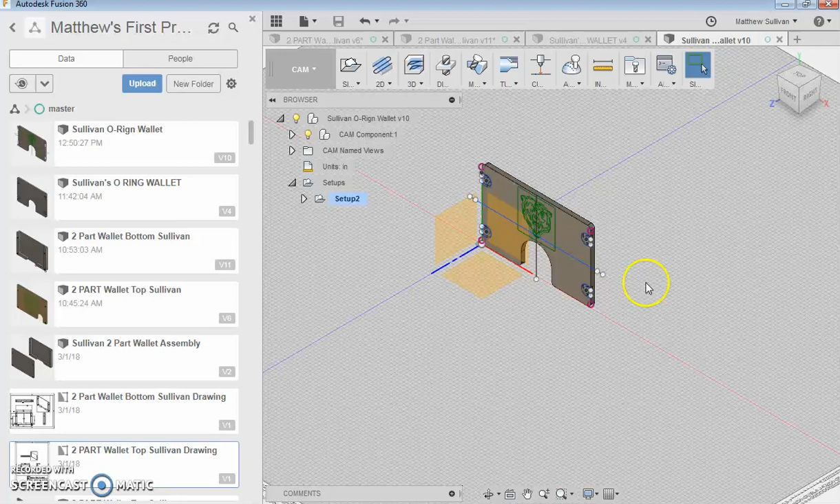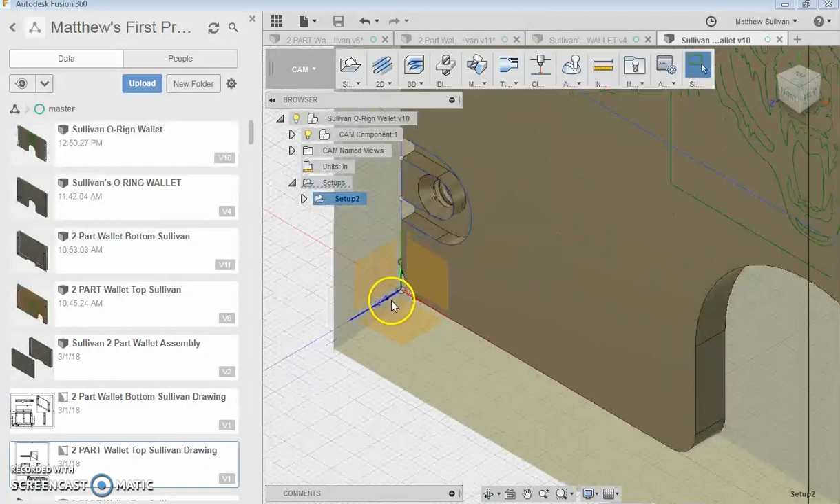In this video we're going to be covering a combination of setting up the backside operation and post processing both setups for this final activity. If you notice, our first setup is going to be right here on the face. This is our XYZ0. Our next XYZ0 is going to be the backside facing down behind the part.

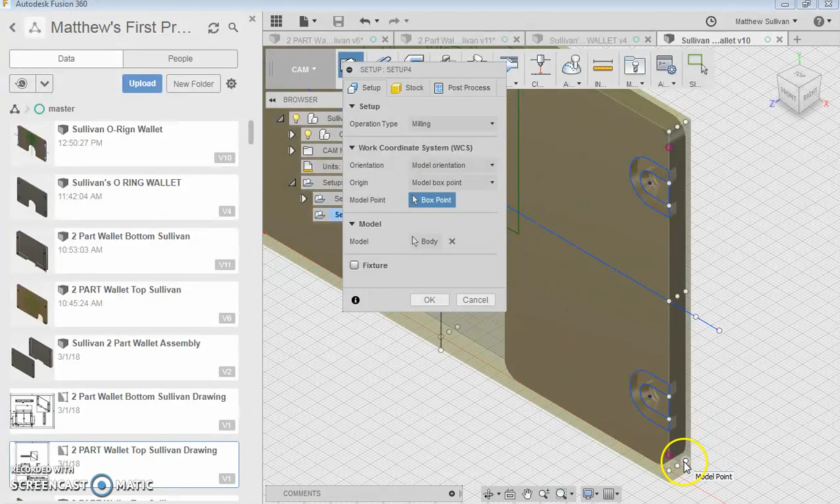And we're going to do that by going to setup, and we're not going to do box point. We're going to do model or stock box point. We're going to go to model box point. The box point we're going to select is going to be right here. The complication is our Z axis is facing the wrong way, so we could try maybe flipping it.

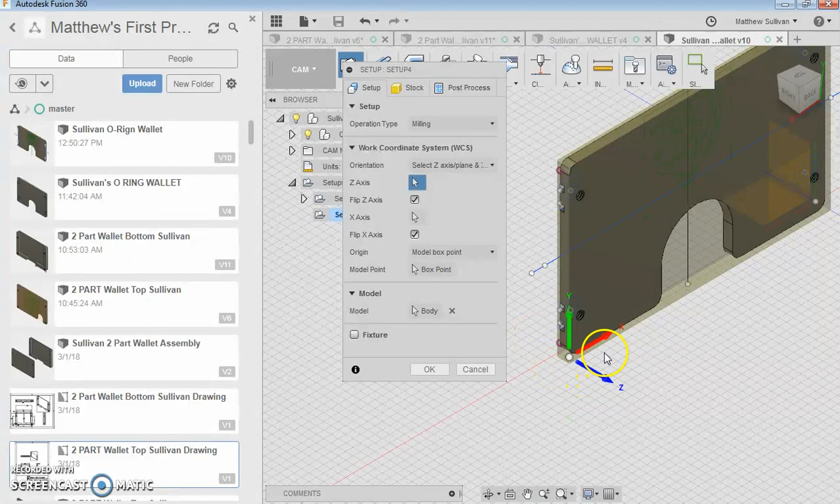One thing you could do is try flipping it and flipping X, and right now it is flipped the correct way. This is one option to quickly reorient your WCS just by touching the arrows. I'm left clicking the arrow and left clicking the arrow to just kind of move things around. If I go down here to box point, I have everything lined up. I'm not sure if we're going to come back in and select a Z face and an X face, but right now it looks like everything's happy. There's a possibility we may need to do that.

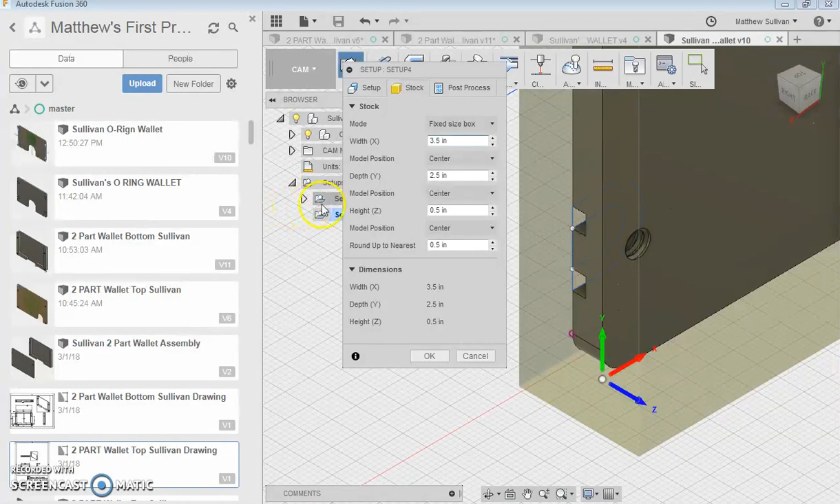Over here in stock, we're going to flip from relative size to fixed size, so we can type in an actual distance. And that's going to mirror our distance over here. So 3.5 inches is about exactly what we have here. We're going to cut the material 3.625 for this activity, so we have a little bit more material to cut out. And it'll match what we had over there.

We have a 1/2 inch for our height, and then 2.5 on our Y. I believe it was 3 inches. Hopefully it is 3 inches on the other one. Otherwise, we have to go back and make some minor adjustments on the other bit of material. But we do have 3-inch stock. It's not 2.5-inch stock. We're going to go ahead and select OK.

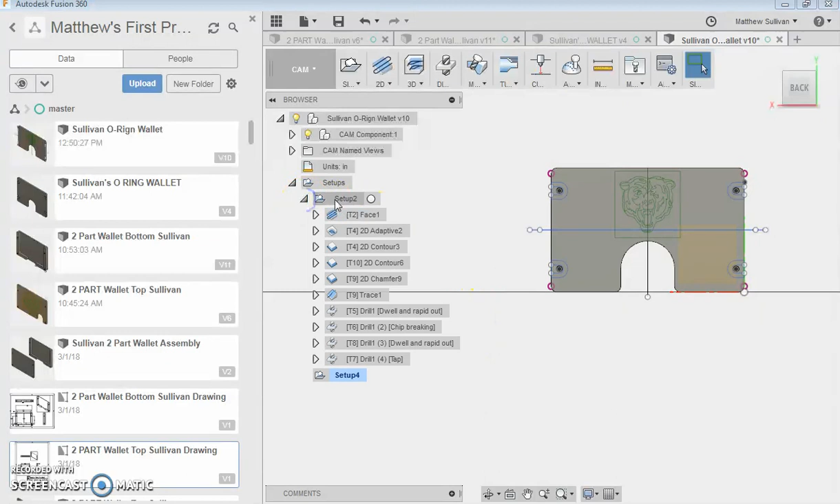And while I'm thinking about that, we're also going to go over here and right-click and edit this one and just double-check the stock is at 3. So the Y-axis here is not 3.0, so we're going to need to update that here too. And all of a sudden, all of our toolpaths appear to have gone bad. They're actually not bad. You just need to highlight all your toolpaths, generate, and they will update automatically.

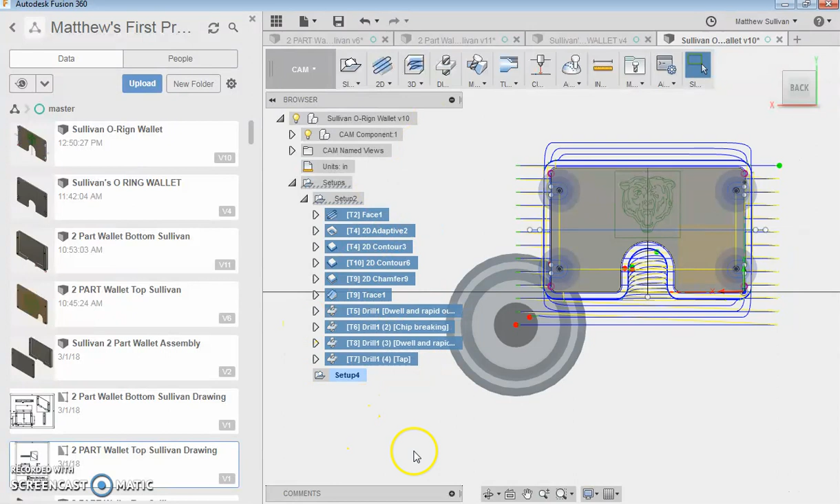The only thing I really noticed that changed here is this adaptive. So the adaptive clearing is going to take a couple more passes to clean things up, but it's going to add some more time. But the material is 3 inches, so that's what we have to work with. So here on this setup, we're going to minimize this one. We're going to come back over here, go back and edit. It looks like we're good. Stock is now set up.

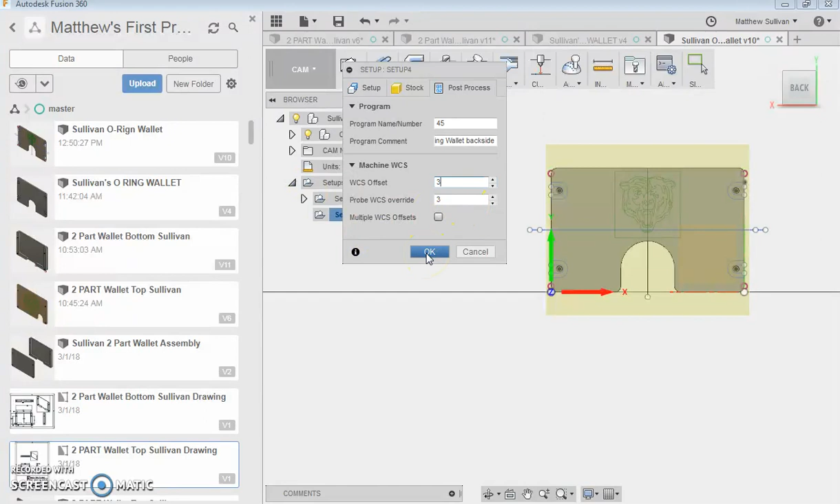Post process. I believe my last post process was 44, so I'm going to go 45. Program comment is: put your name, O-ring. I'm not sure if you can do dashes, so I'm going to do ring, O-ring, wallet, backside, or bottom side, or however you want to call it. WCS is going to be number 3. Again, we're going to select OK. And now we have our WCS set up exactly where we need it to be set up.

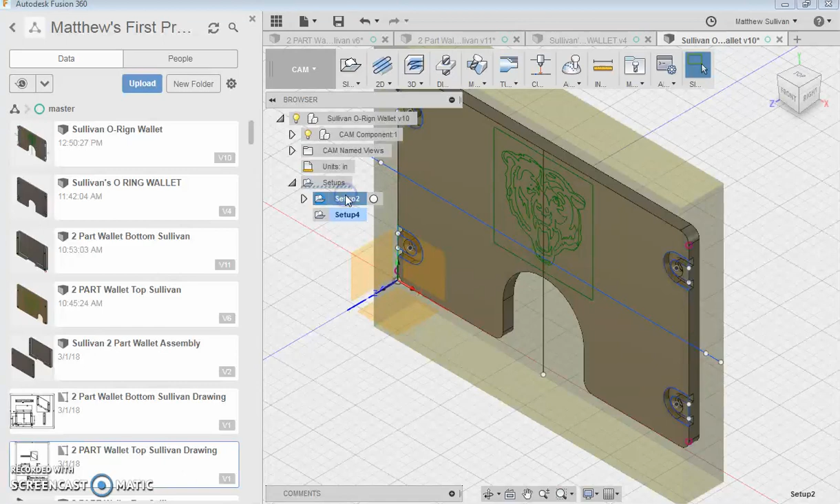And we are going to go ahead and be ready to manufacture our parts. So do our toolpath. So Z is this one. The Z is on the front face in the first quadrant, on the back face in the first quadrant. And it is on the first quadrant if you kind of rotate things and click on the back side. This is the first quadrant. So now we're going to go ahead and continue doing our toolpaths.

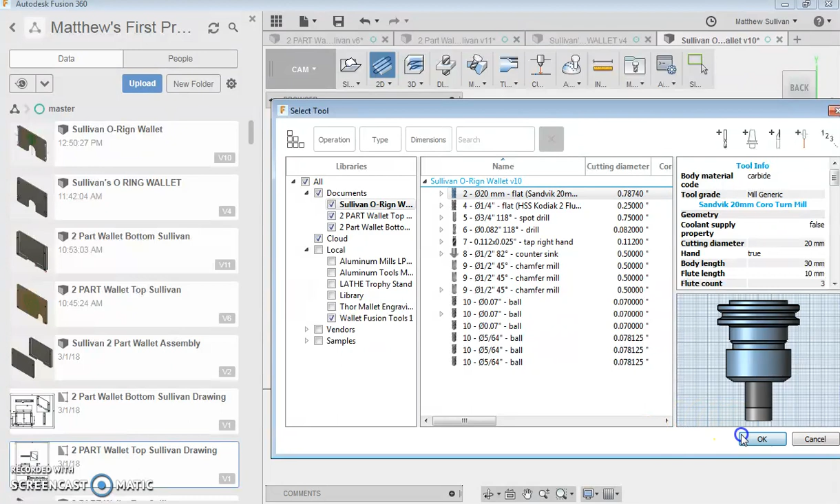We're going to go over to a facing operation, which is right here at the top. What are we going to face? Well, we're going to switch to tool number 2. Select OK. Disable the coolant. Passes, pass extension 0.45. Stock offset, I believe we need to change that. The step over is 0.25. Select OK. Let's just see what this looks like.

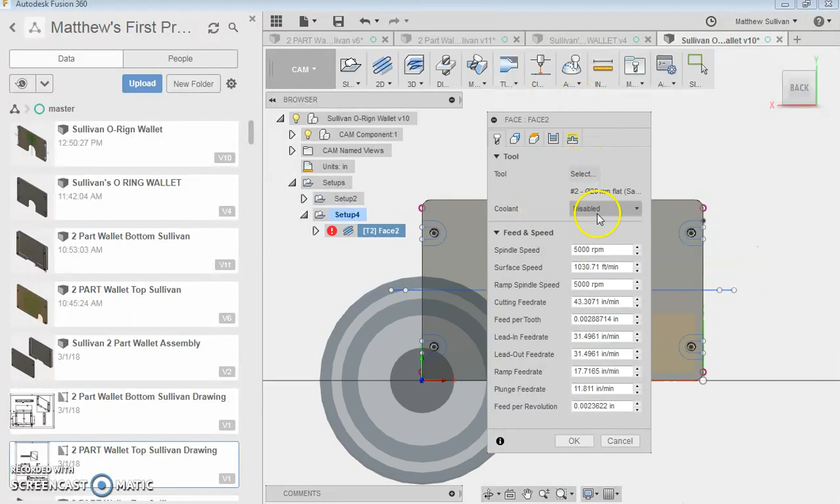I forgot to go ahead, right click, edit. We also need to do not both ways, but climb milling. Otherwise, material could come flying out of the machine, or we might break a tool, so we do need to be on climb milling. This will take care of 100% of all the material we need to cut off.

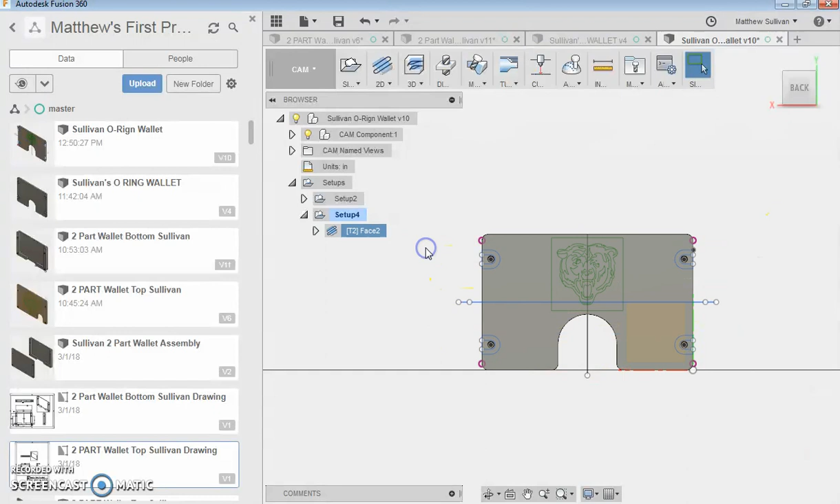And the material might be all finished up after this pass here, so we may even need to go up there, but that's not going to make much of a difference at this point in time. Right now, we're going to go ahead and hit Control S for a save, hit OK.

And we can go ahead and start our post-process procedure. So it's just updating up here now, saved. And now you're going to go ahead and you're going to right click and post process. And I'm doing this on setup number 2. I'm going to minimize this just so you don't get confused.

I'm on the setup here, post process, and everything should be saved, but if it isn't, things are going to need to change. Right here, you're going to need to change it to Haas pre-NGC / Haas. Over here, we're going to need to go to your CNC programming under your H drive, under CIM, under CNC programming projects, hit open. Over here, program number 44, I do believe it was 44. It might be 40. Oh, this one was 44. The next one's 45. Sullivan O-ring wallet.

I'm going to say front side, inches, and then we're going to scroll down here, make sure preload tool is no. This has to be no. And go ahead and select post. And we're going to call it Sullivan O-ring, or please call it your name, O-ring wallet, front side. Save.

If you haven't already opened up Inventor and HSM, please do so. I have some previous projects over here. I'm going to go ahead and close them out. Do not need them. You should have nothing open, possibly. You go over to Editor, go to Open, and you're going to have your O-ring wallet. Hit Open. Go to Backplot.

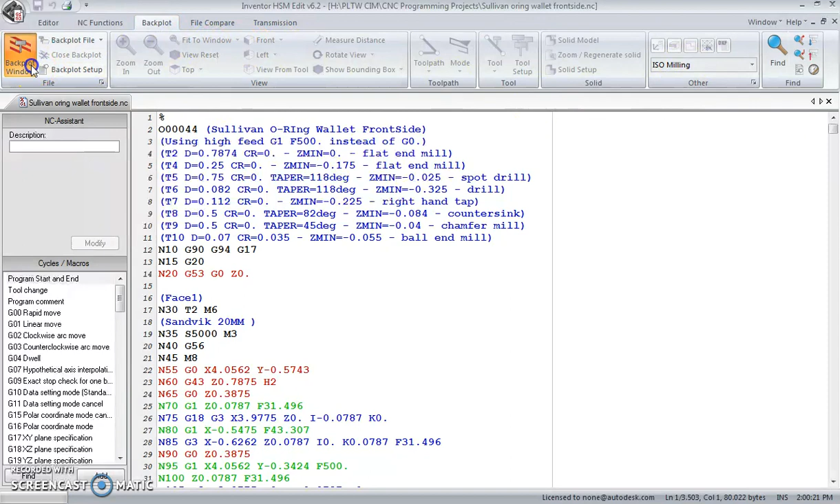Make sure you're on ISO milling on both Editor and Backplot window, and take a look at what you have made so far. So kind of rotate things around. Okay, it doesn't look like there's any real issues. Everything looks really good. Things I'm just inspecting right now is we have our WCS in the first quadrant. We have the Bears logo.

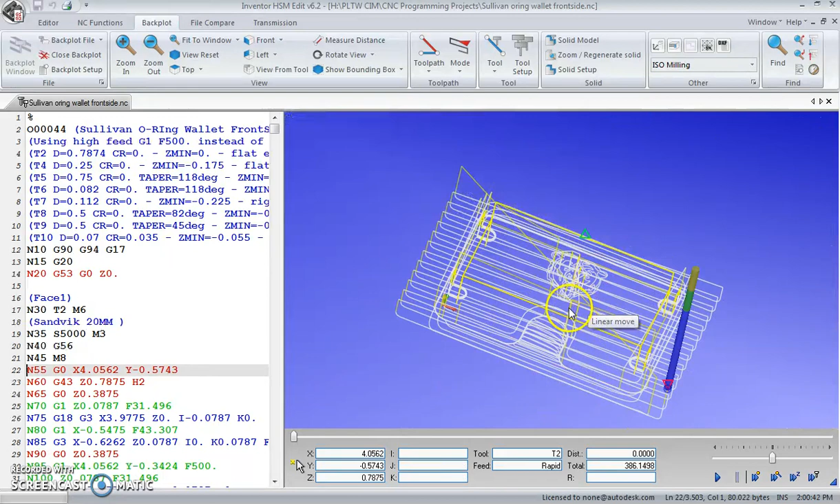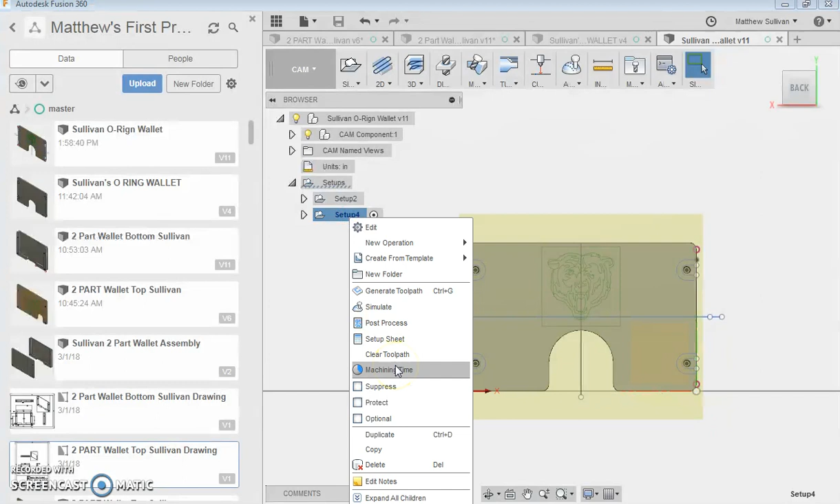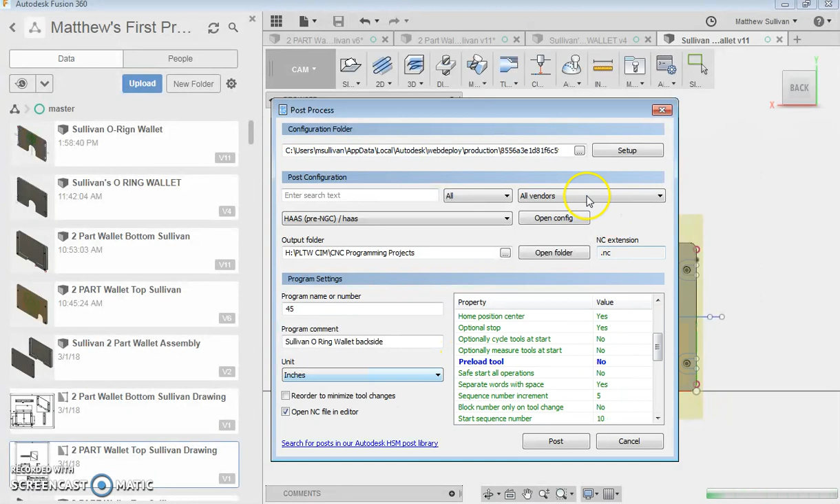Again, it's the Haas in parentheses pre-NGC in parentheses /haas. We're going to be saving to the H drive. Again, click here. Program 45. This is the O-ring backside. Put your name there, inches, and scroll down. Make sure preload tool is no. You have to make sure all the parameters here are set. If they're not set, it will not machine.

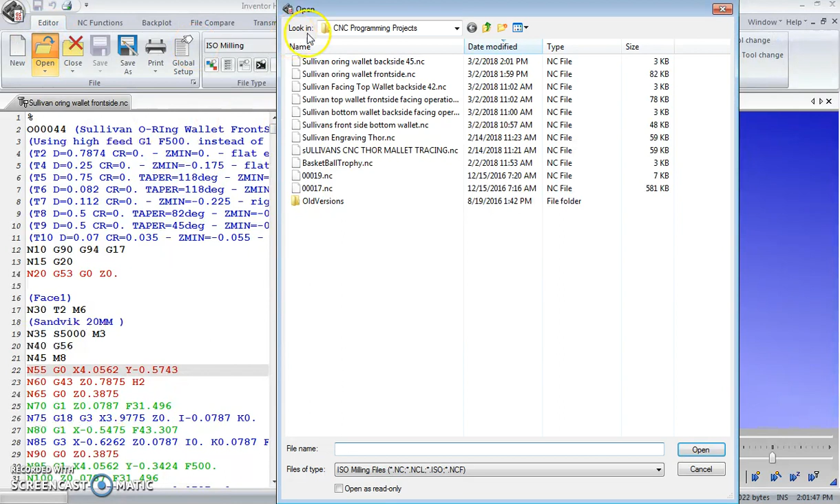Hit post, and I'm going to click on this. This is not the front side. This is the back side, and this is program 45. So I'll hit save, and I'm going to flip over to here. I'm going to go to editor, click on open, and choose 45. Hit open again, and go over to backplot.

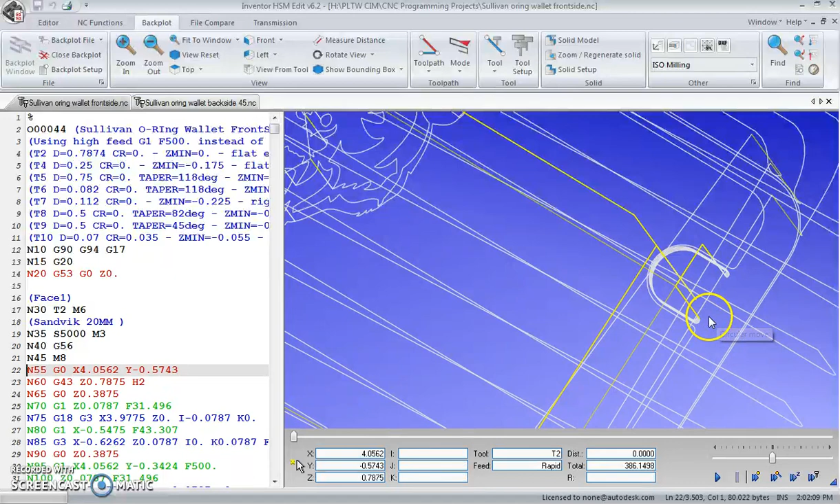Make sure the editor is in milling. It should be, and this is milling backplot, and this is what the backside of your program is going to end up looking like. And everything looks great. Flip between these two and make sure you got everything in there. Make sure you have the loops, the holes, the drilling, the engraving that you want, whatever are the details.

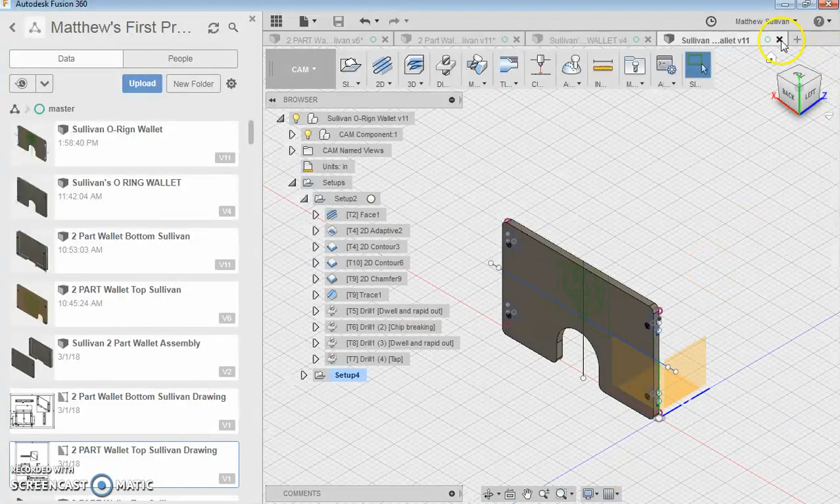You can add more details in here if you wanted to in this Fusion activity. You're not limited to just one tracing operation. You could do 5 or 6 tracing operations. Go get crazy. And that is the entire O-ring project, I'm going to hit the front side so you can better see this, for the manufacturing processes for this wallet.

So you're now ready to take it over to the CNC machine, save your files over to the iDrive. So make sure that you go to your H drive, into your CIM folder, and your programming projects, and you move your files into the iDrive under students, under save work, under Sullivan, and under CIM 2018 projects. And I'm going to make a new folder here called wallets

2018 milling. Please save it in this folder and populate this folder with all your wallet G&M codes, and you could do so by dragging and dropping in your activities. So CNC projects, whatever project you have, you can go ahead and drag and drop into that folder. Thank you for viewing, and hope you enjoyed.